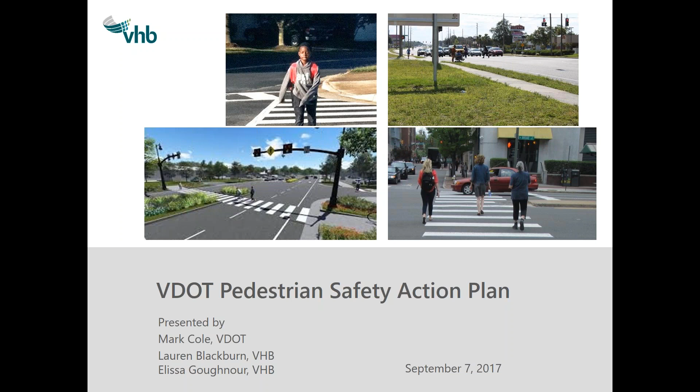So pedestrian safety, as you may know, is critical to VDOT and is an issue of importance across the state and the country. In Virginia, pedestrians make up a large portion of our deaths on our highway system. In 2016, they accounted for about 16% of our fatalities in Virginia.

Over time, pedestrian deaths have ranged from 10 to 15% on average of our highway deaths. 2016 saw a huge increase in pedestrian deaths, and so far 2017 is also showing elevated numbers, which is of grave concern to us. One of our focuses in highway safety is to ensure that we do everything possible to provide safe travel for all modes of transportation, including pedestrians. It's important as a state agency to provide a street and highway system that's safe for all users and that encourages all modes of transportation.

There are a lot of reasons that we want to do this, and pedestrian safety is something that we're trying to understand better so that we can provide a safe transportation system. Next slide.

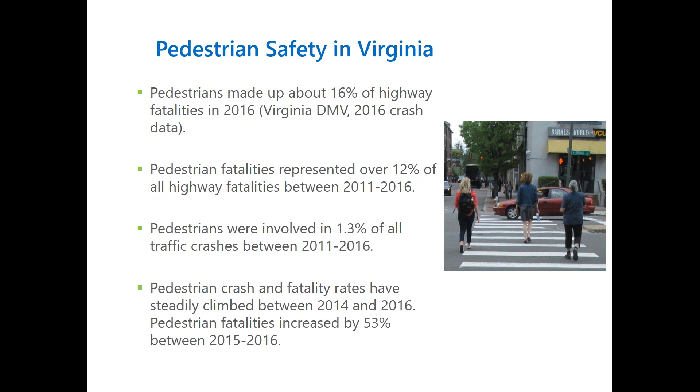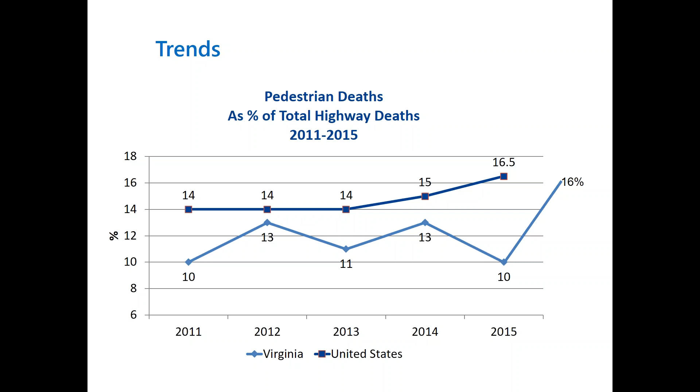Some of the work we've been engaged in over the past couple of years is digging deeper into our pedestrian crash data to try to understand the factors that contribute to pedestrian injuries and fatalities.

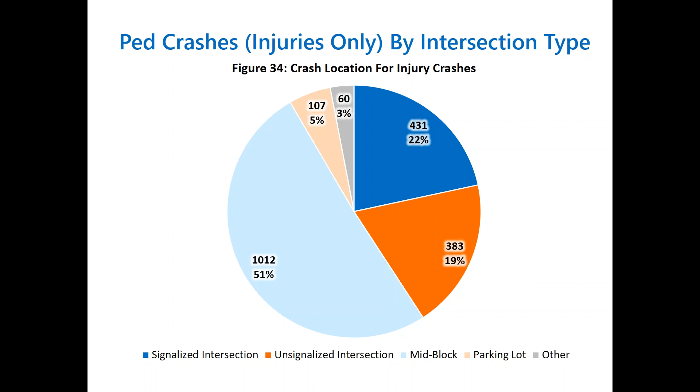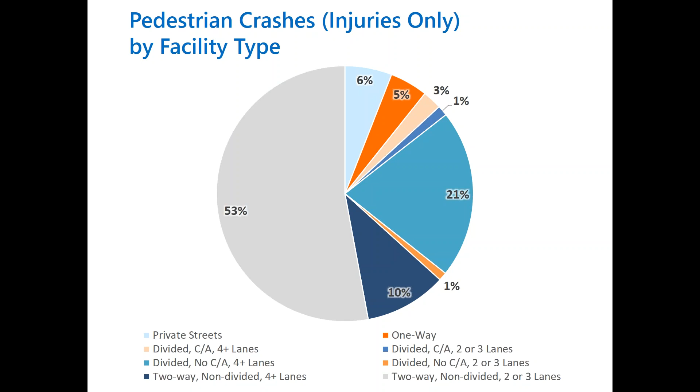But we also have a large number, especially on our larger arterial street system, noted by the divided 4+ lanes shown in aqua color. As the state continues to urbanize with more urban and suburban areas having these large arterials with pedestrian land uses along the sides, we're seeing a greater proportion of our injury crashes in those locations. Next slide, please.

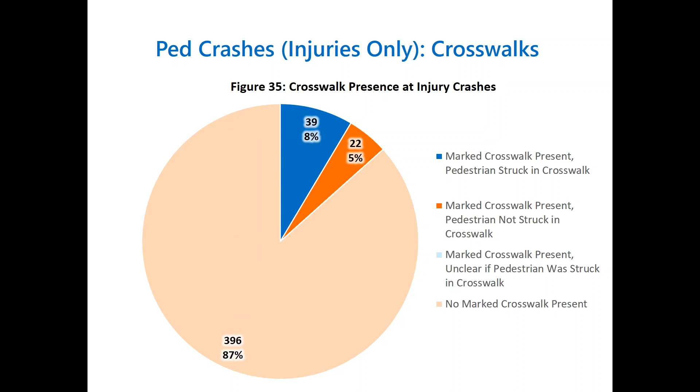This slide shows pedestrian injury crashes where we have a marked crosswalk in place or we don't. We've reviewed all the crash data in addition to reviewing satellite imagery as to where the crashes occurred, and from that information we're able to determine if a marked crosswalk was available where a crash happened. When we see crash data of pedestrians trying to cross the street, it indicates there is a crossing demand at that location, so we're trying to get an idea as to whether a marked crosswalk was present. What you see here illustrates that in almost 90% of the locations where we had an injury crash with a pedestrian, no marked crosswalk was available. Next slide, please.

One of the most important parts about this effort occurs at the local level. We have a lot of great local partners around the state, many of whom are experts when it comes to pedestrian travel and transportation, and we wanted to get input from those partners and make sure this effort helps our localities as well.

As part of this effort, we've developed priority sites and countermeasures through the PSAP process that will be shared with both VDOT district staff and localities. We're going to ask both VDOT district staff and local partners to look at those locations and any current plans for projects or improvements, and to consider whether the right features are in those projects to address pedestrian safety concerns.

We are developing a process with the PSAP to identify those high crash intersections and corridors. We appreciate going forward the support of all of you to help us refine this information.

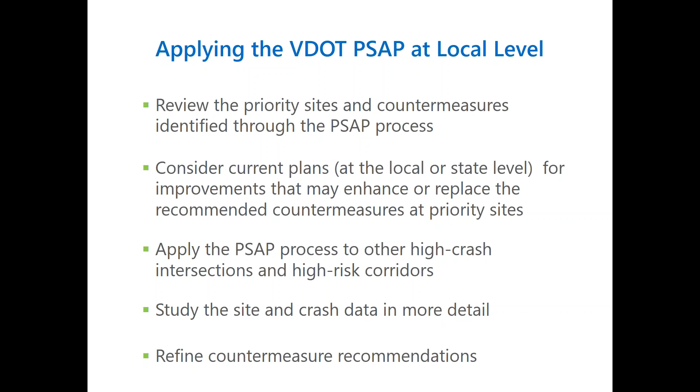This is an overview of our schedule for the PSAP. We started back in May of this year and have been making steady progress. We formed a stakeholder team, and we have a slide in a minute showing the members of that team. We owe a debt of gratitude to all those folks, including both VDOT and local people, who helped inform the process.

We've been having a series of stakeholder meetings as we've reviewed policies and practices. We've talked about risk factors for pedestrian crashes, reviewed a lot of crash data, hotspots, and corridor information, and begun to identify preliminary safety countermeasures that could potentially help address some of the safety issues we've seen.

We wanted to have this webinar today to give you an update on where we are with the process, and to share some of the initial tools we've created, thinking they may be useful since we're in the period of the year when folks are putting together their project applications for safety funds. Those are due November 1st, so we wanted to get this information to you in case any safety priority locations overlap with where you were thinking of doing projects.

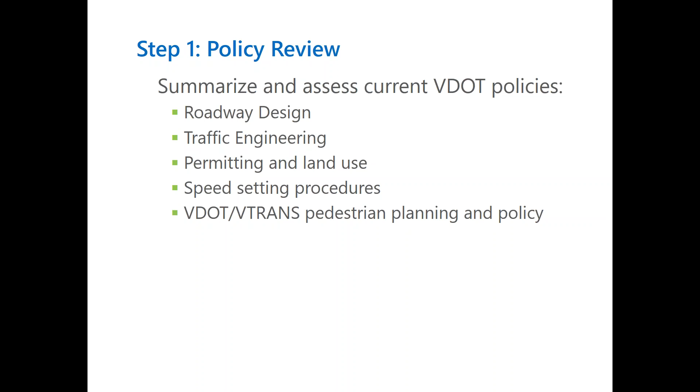The first step was to evaluate current VDOT policies and methods. We looked at a series of policies in different parts of the organization - roadway design, traffic engineering, permitting and land use elements, as well as speed setting and other safety programs and policies. This information was important because it helped us understand the baseline of where folks are currently working within pedestrian safety, as well as current practice for when and where countermeasures are being implemented.

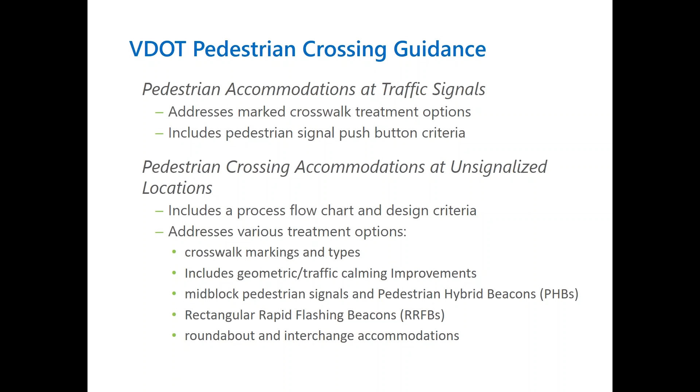This is especially a focus for this process because of what Mark touched on earlier about the degree and volume of pedestrian crashes occurring at uncontrolled locations. This second policy, the pedestrian crossing accommodations at unsignalized locations, includes flowcharts and design criteria for when and where to consider installing crosswalk markings and different types of treatments, such as pedestrian signals and hybrid beacons.

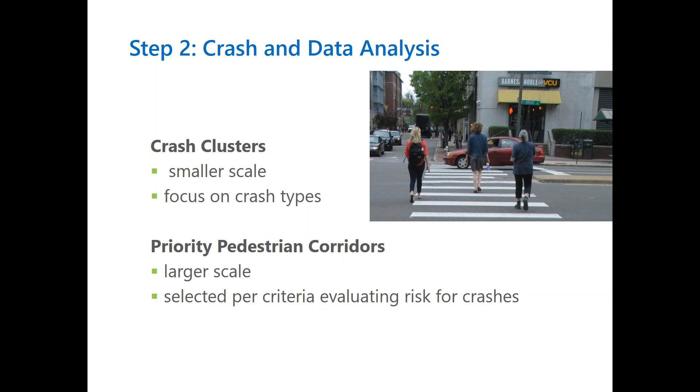Following the review of policy and current processes, the next step was to look further into the data and better understand trends, discussing different ways of measuring risk for pedestrian crashes. We did this in two basic ways. The first method was creating what we call crash clusters - I'll describe that process in more depth shortly. It's very focused on the history, location, and density of pedestrian crashes. The second process was more risk-based, looking at the potential for pedestrian crashes based on a set of criteria - a more systemic set of variables considering where pedestrian crashes are likely to occur, even without a strong history in the past.

When we did that GIS analysis, we ended up with bright orange-red spots where density or intensity was strongest, and lighter green or yellow colors showing where the density of pedestrian crash history has not been as intense. Trying to identify the distinct number of places with clusters of pedestrian crashes statewide, we spotted around 325 total, and needed to find a way to prioritize that. Looking at a spread of numbers, we've identified about 19 locations where crash clusters are most intense.

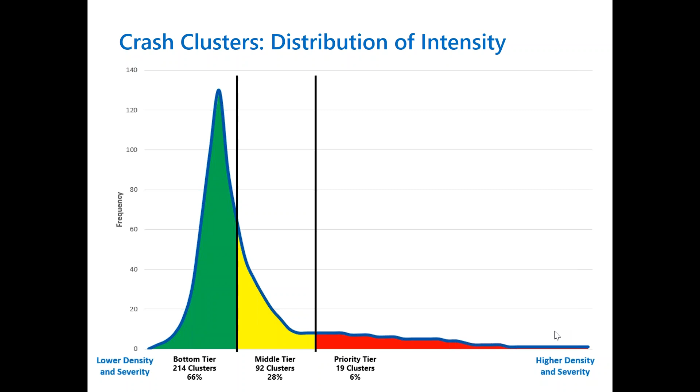And then there's, of course, a lot of volumes of traffic and pedestrians along the major corridors and more outlying or suburban or rural locations. The inset maps to the left zoom in a bit further into some of those brighter orange-red locations.

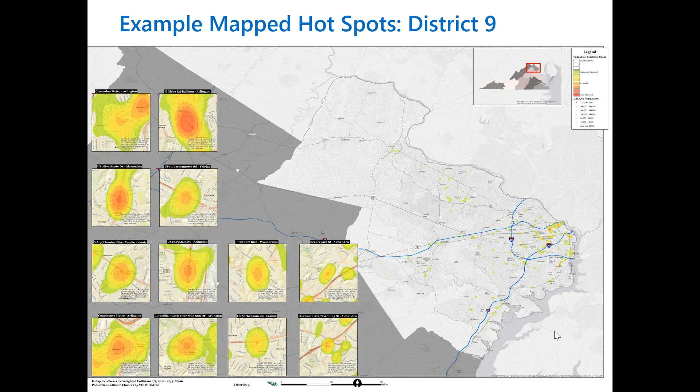If you zoomed in further into one part of that crash cluster analysis map, you would see an image like this. I keep comparing it to an analogy of a weather map, where there's not a distinct break where a cluster stops and another may begin, but it definitely picks up on places within a community that are perhaps more prone to having had pedestrian crashes.

And also a bright red or orange doesn't necessarily mean that was what you could think of as an epicenter of crash locations. It just happens to be the place where the analysis identified where the density or proximity of the crashes were closest. But it's still a very good indicator.

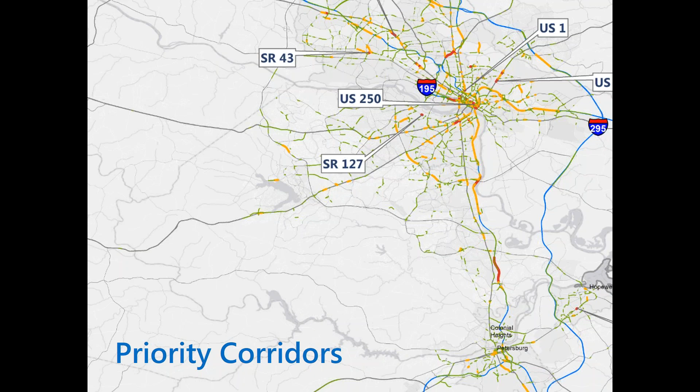So moving on to the priority corridors. This is the process where we didn't have as much emphasis placed on crash history, but looked at risk. This is analyzing corridors per the potential for pedestrian crashes. So we looked for data that would be available statewide that could help inform that process.

There's some good data available statewide that could help inform things like the density of the population. There's a fair amount of information in VDOT's GIS system about the road networks themselves, specifying things like speed limits or volumes or ADTs along that roadway. But then there were some layers that we wished we had had, or maybe weren't completely available to the degree we needed.

That we still think would be extremely valuable, that when a more local agency wanted to look at these sites, if they have access to any of this additional data, we strongly encourage them to look at that to help inform further what may be happening on the ground.

So we were able to secure statewide data that talks about pedestrian destinations nearby, such as parks, trails, and schools. We also looked at whether or not the corridor was in an urbanized area or a more rural area. We were able to include posted speed limits, as well as a whole host of information about the population, employment densities, vehicle ownership, a lot of information from the U.S. Census.

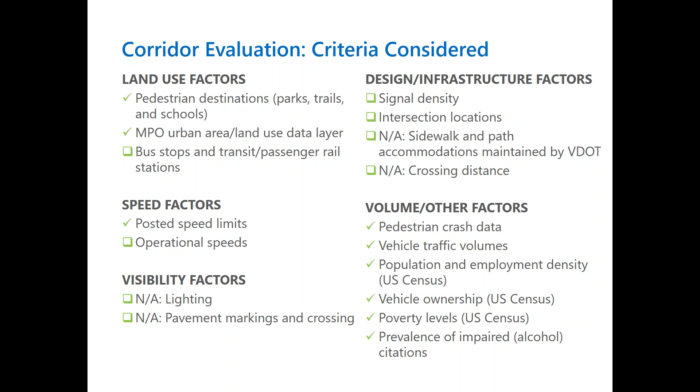What was missing from this, that would be helpful to review at a local level, are things like bus stop locations with respect to pedestrian corridors, as well as actual speeds from speed studies, if conducted. Information about lighting conditions and pavement markings would also be important data. As this process continues to refine itself and other data sources improve, such as statewide transit layers, that will be important to add back into the process as the overall priority corridor analysis is reviewed.

As you might imagine, when we did the analysis, we ended up with a lot of corridors that may become a good priority. So we needed to come up with a process for filtering it down to a manageable number of corridors to study further. This chart explains our process for doing that.

When you looked at the corridors of whatever length that were in the very top 1% of the total score, that helped us identify places overall that we wanted to consider as priority corridors. Some of those corridors are very short segments and may have even been separated by just a few hundred feet from another priority corridor segment, so we combined those into complete links by looking at other high-scoring corridor segments.

Ultimately, we wanted to make sure we had corridors long enough to consider from a systemic perspective, as well as ensuring they basically fit within the same jurisdiction or district, but we weren't completely exclusive, meaning we didn't kick out a corridor just because it crossed between two towns. This is the process for identifying the top priority corridors with respect to finding what countermeasures would make sense, but there's a lot more out there that we still encourage agencies to explore.

Very quickly, I'll show how these beads, as I call them, the high priority beads, string together into a priority corridor. These colors represent the scores, so a magenta color represents a 1% piece of a corridor, and red is within the top 10. You string them together into cohesive corridors, and the blue lines are essentially what you see form.

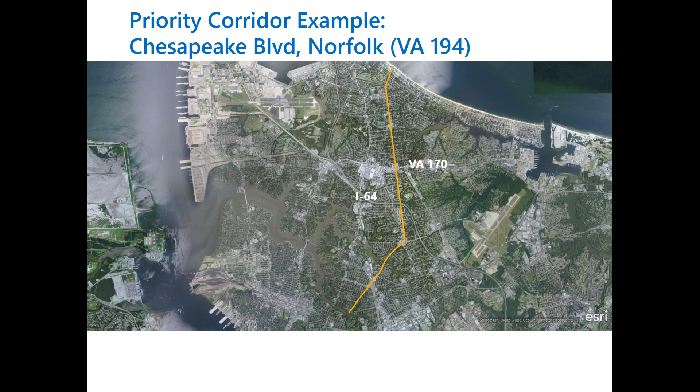Then you zoom in on one of those priority corridors, and this is an example in the Hampton Roads District along Chesapeake Boulevard in Norfolk. It is a multi-lane road, and what we'll end up doing with this is creating these cut sheets to describe the corridor more thoroughly and some of the countermeasures that might work best.

That is a very brief summary of the analysis that we went through. And then, of course, an important part of this is identifying countermeasures. So a couple key points here.

We looked at countermeasures that have been highlighted by organizations such as Federal Highways as proven or well-established countermeasure types. We looked at a lot of guidance through organizations or resources such as PedSafe, which is maintained by the Highway Safety Research Center, as well as a number of reports produced by the Transportation Research Board.

VDOT policies are an important part of this, making sure that countermeasures we're recommending are consistent with either policies that VDOT currently has or policies that VDOT may be considering changing. We'll be focusing on the top priority sites, but there are lots of priority corridors out there that we encourage local agencies to look at.

You could consider following a similar method to select countermeasures for those same sites. When you see a priority corridor, your town, city, or district may already have planned something for those sites, which makes sense if you've noticed a history or heard complaints. Certainly take that planned project or improvement into consideration when comparing it against some of the countermeasures we'll be recommending.

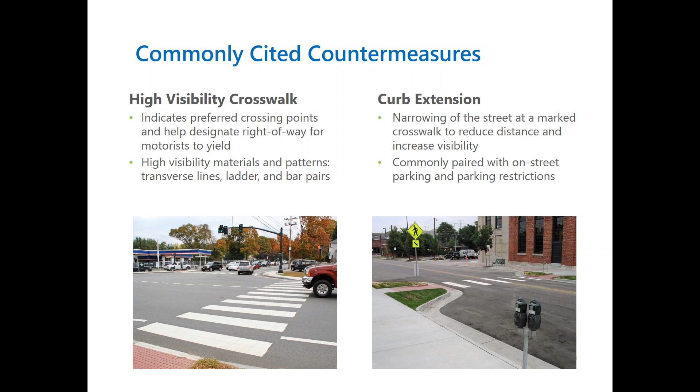As well as curb extensions where that's feasible, maybe at an intersection, but in some cases mid-block crossing locations can also include a curb extension. These have the benefit of enhancing the visibility of the pedestrian in the crosswalk.

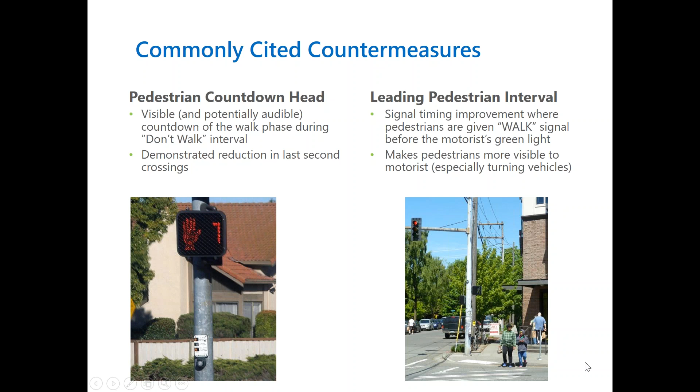Leading pedestrian intervals are another countermeasure type we've recommended multiple times, and that will address the same issue where pedestrians need a little more time to be able to cross the street.

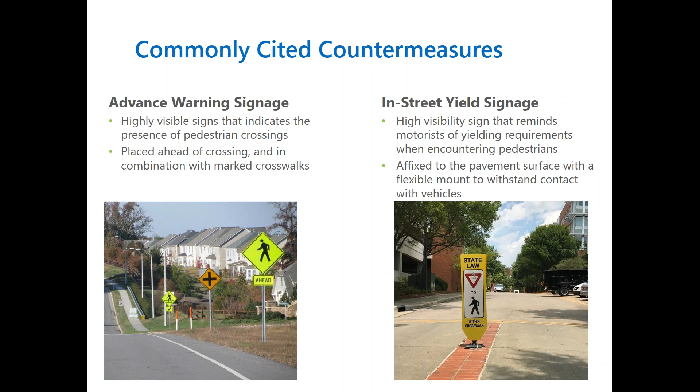Another pair of countermeasures you'll notice in the report are things like signage - advance warning signage ahead of a crosswalk or crossing, or in-street yield signage. We'll look at those especially where the pedestrian risk is greatest at non-controlled or uncontrolled crossing locations.

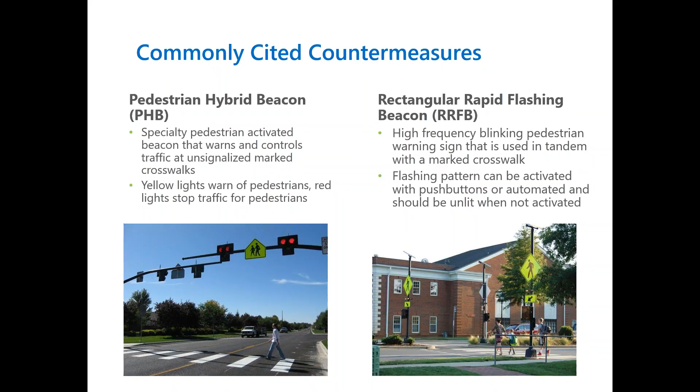Another pairing is, as Mark mentioned earlier, that there was a large percentage of pedestrian crashes that occurred where there was not a refuge island or median in multi-lane conditions. This is a good countermeasure for situations where pedestrians are hit at multi-lane roadways, especially if there's an opportunity to place the median inside a two-way turn lane.

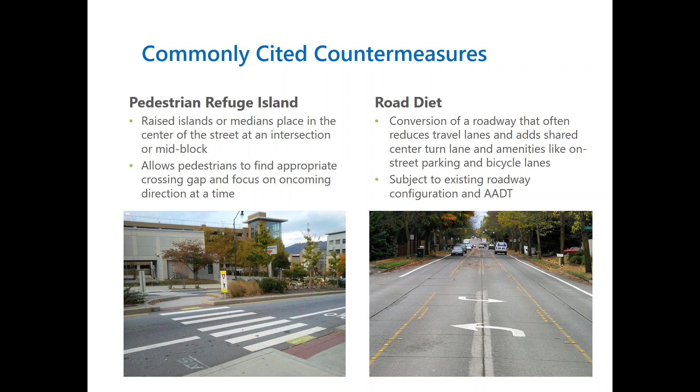Road diets are another countermeasure commonly associated with allowing for bike lanes, but they also help reduce the crossing distance for pedestrians. This is also a countermeasure, especially where other data is taken into account, such as traffic volumes and speed and other traffic data.

Lastly, a couple of pairings not so much about crossing the street, but very important pedestrian safety treatments, are continuing to plug gaps in the sidewalk network where those gaps are noticed, and where there are bus stops, improving the pedestrian network to include wide sidewalks, level landing pads, as well as mid-block crossings at those locations - especially where you have high volumes of pedestrian traffic or transit users.

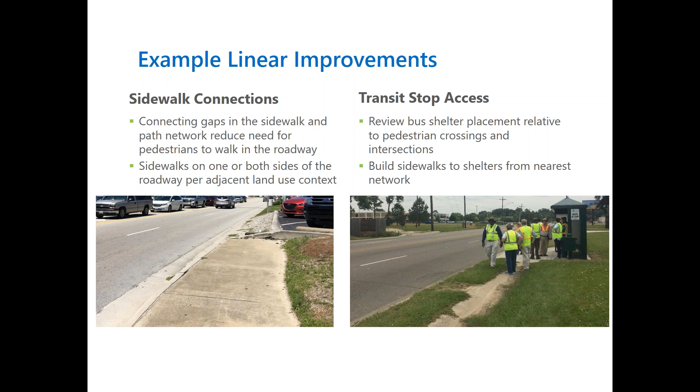So again, we looked at a whole variety of data when looking at the priority corridors and crash cluster sites - the travel lane number, the speed limit, traffic volumes, whether or not there is a median or refuge island. We looked at relative pedestrian volume or activity, so where it's nearby a major destination, that also tells us more about the expected volumes of pedestrian traffic.

And then, of course, looking at crashes where available to see if there's anything more we can glean from the crash reports about some of the contributing factors to pedestrian safety.

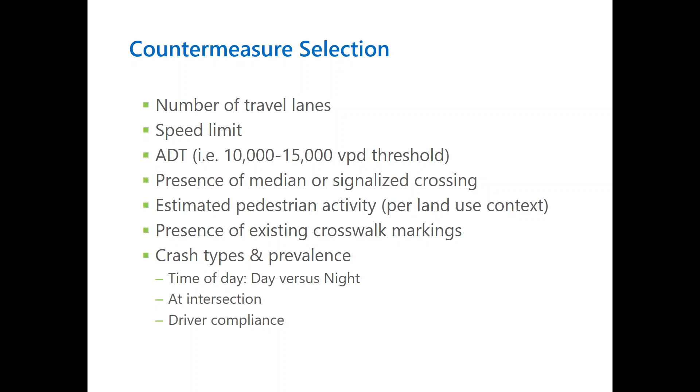We'll also note the posted speed limit and the number of crashes caused by driver action or affected by whether the crash happened during the day. All of that comes together to give guidance on whether the crossing locations would benefit from things like curb extensions to help slow traffic, or parking restrictions to improve visibility of the pedestrian while crossing. If there are a lot of pedestrian crashes at night, that suggests lighting improvements.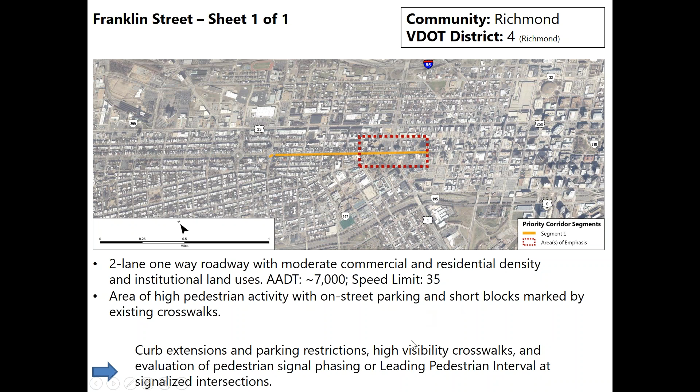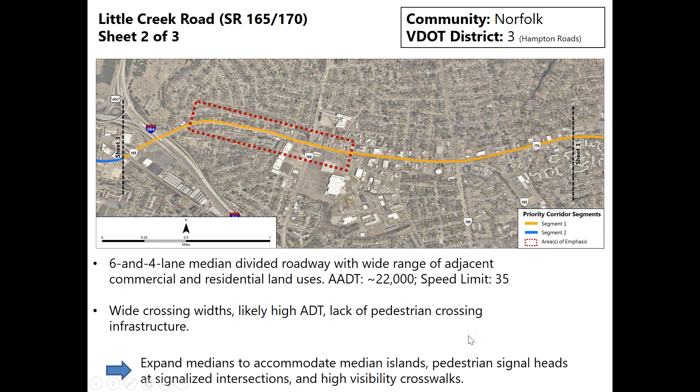And one more example, this one is in Roanoke County. A 4-lane median divided roadway in a more suburban type context, with very high volume, high speed limit, and very little in the way of pedestrian crossing infrastructure. So there's a lot of opportunity for things to happen here.

Placing in median islands or hybrid beacons along with a high-vis marked crosswalk at very strategic locations would be a good path forward here, as well as looking at increasing or improving the gaps in sidewalks or paths along the road. So where there's a lot of pedestrian traffic expected but little in the way of infrastructure, this definitely speaks to being one type of priority corridor.

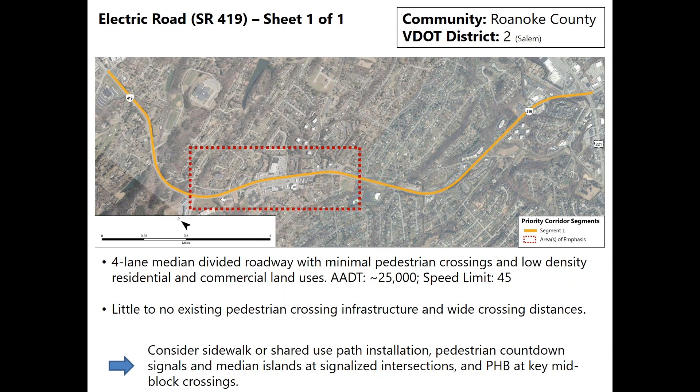So before we go into some of the policy recommendations, before we leave the corridors, I'll just say we'll be producing a series of cut sheet maps for every priority corridor that we've identified. And once you learn that there's a priority corridor in your community, districts or local agencies would contact Mark Cole at VDOT to acquire that cut sheet so that you can study your site further.

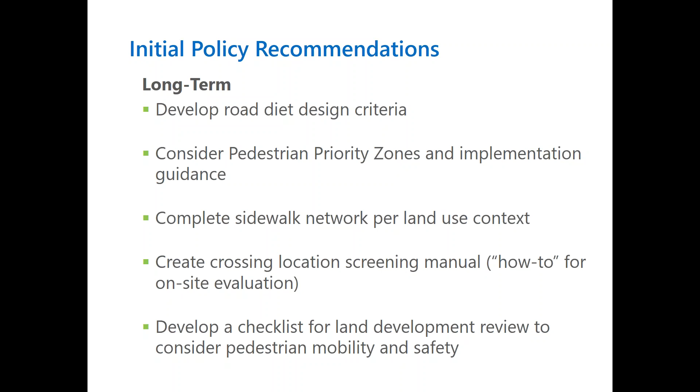And then other policies for continued review, such as when and where sidewalks should be placed on one or both sides of the street relative to land use, and other things such as checklists for development review to make sure it's looking at all aspects of pedestrian safety.

So that is a very brief summary of the process and where we are today. And we do have a bit more to do.

The next steps for this PSAP is to create project recommendations at the short, mid, and long-term level, taking another look at all of those priority sites and putting them into a series of horizons for when some of them should happen sooner than others.

And then same for the policy recommendations, which should be followed up on sooner than later. We expect, as Mark said, to produce a final report including all of these crash cluster and corridor site maps, as well as a lot of other data, by the end of the year or next spring, followed up with a series of workshops to explain more about the process and how other partners can use this data.

And of course, there is a lot more for folks to help with examining these sites further. I think by early next week, we'll have published some maps that show the locations of the crash clusters as well as these priority corridor sites.

And Mark, maybe you can speak to this. I think once we've published that, as well as uploaded the recording of this webinar, the links to those maps will be available on a VDOT site for either webinar participants or the general public to follow through on. Is that correct?